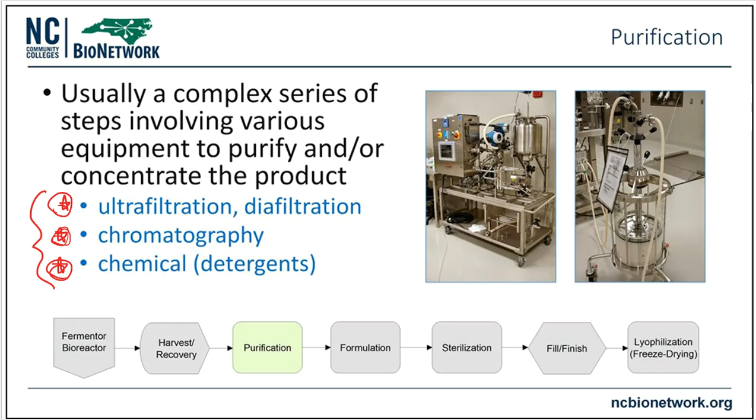Down at the bottom, we talked about a bioreactor or a fermenter, the harvest, the recovery, the purification, the formulation. We skipped the sterilization part. We went to fill finish, and we skipped the freeze-drying part. So now that you have a broader picture, now that you have this overview of what's happening on the inside of a company, we need to now take a little bit more time and discuss more details of certain steps along the way. And that's what section 5.4 is going to be about in your textbook.

So the process equipment section is going to start here. And one of the very first things, as you can imagine, that they are going to discuss is good old faithful. And that good old faithful is our bioreactor or our fermenter. So we need to go back and talk a little bit more about the details that go on inside of this contraption that could be way bigger than me in a manufacturing line or a production line.

So every facility needs certain pieces of equipment, right? That's what this chapter is all about. It's about equipment and it's about utilities. So we need to talk about the equipment. And this equipment, yes, it is fermenters and it is bioreactors, but you know what? It's way more than that, because the facility also needs equipment that will store the materials until we're ready for them, and then process materials, as I'm needing and using them, and then equipment that moves it from one step to the next. All of that is equipment, right? All of that are moving parts of the puzzle in the biomanufacturing arena.

So with the pieces of equipment, what you're seeing over here on the right-hand side are just examples. That's all that it is. It looks like I've got a big old maniac mansion bioreactor right there, and then I am putting stuff in it, and then we're taking stuff out through the help of pumps, and we're cleaning it up with some filters, and then we're putting it into another container or contraption, and then we eventually start filling up little containers. Okay, all of that is equipment. I know that, but we need to talk about details now. That's what this is all about.

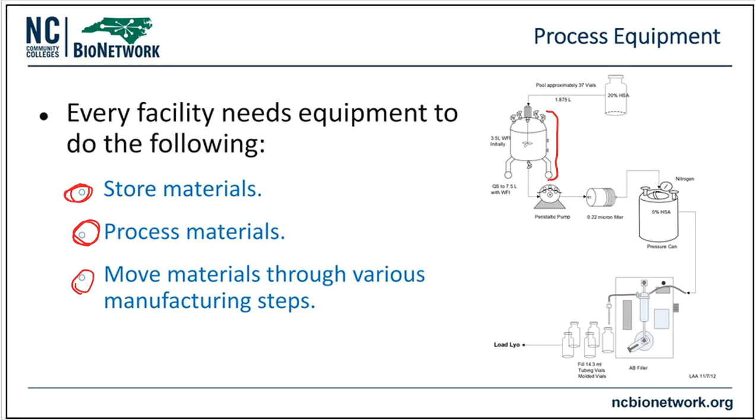The problem, oh no, is that some of the equipment is proprietary. So we don't really even know the little ins and outs of some of this equipment because these companies are going to keep it a secret. So we can discuss at least the general types of things that you're going to find. But as far as nitpicking details and saying this is the way it's going to be every single time, the answer is no, it's not. Sorry. Different companies will have their own ways of doing things. But there is a general trend here, and we could talk about some of these general trends.

We're going to have instrumentation or equipment that can handle liquids, gases, and solids. It really just depends on what I'm using, what am I making, what are we trying to end up with, and there is an option out there for all of those manufacturing types of companies. So am I making a liquid, and that liquid is going to go into a little tiny vial that's going to be capped? If so, there's instrumentation for that. Am I trying to recover a solid product and clean that solid product up? If so, there's going to be instrumentation for that.

So either way, the company is going to have what the company wants. And there is a chance that this piece of instrumentation or equipment will be modified in order to fit the specific needs of the company that you're working for.

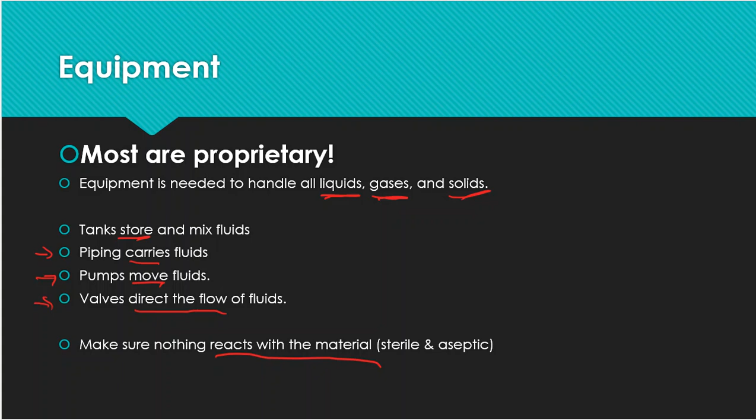So for that reason, stainless steel is actually going to be one of the most common, but there are different choices out there. We'll talk about those choices in just a second. Next up, these pieces have to stay sterile and aseptic. Aseptic basically means the process of making sure it's just completely clean and that it stays clean. And sterile, of course, is the idea that there's no germ, there's no interference, there's no contaminant at all, period, on the types of material and the things that I am using in the manufacturing line. So everything has to stay super clean.

I want you to think of a surgery room, right? That's sterile and aseptic. Aseptic processes take place, and that creates a sterile environment for us to work in, because we want to cut you open and we want to pull your knee apart and we want to tie your ligaments back together into a tiny little knot, and then we're going to sew you back up. Okay, so if that is the case, then I don't want to do that in a dirty, filthy, nasty alleyway. I want to do that in a clean, sterile environment. And biomanufacturing and bioprocessing is going to be the same way.

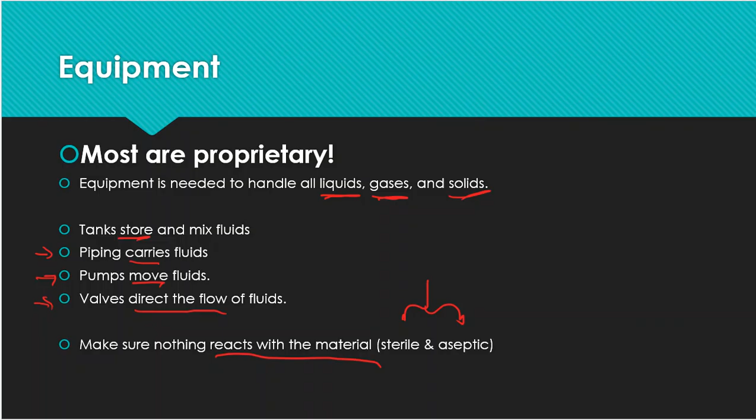Storing and mixing tanks, they do try to reuse them, and we call them fixed or we call them mobile. So fixed just means, of course, they're stationary. They're going to stay put. You're not going to be able to move the tank. And then mobile, of course, are on wheels. Okay, so that way, when it does what it needs to do, I can scoot it from one area of the facility to the next.

So reusable is a very good option, because once I drain or once I dump or once I use the stuff that's in that holding tank, then I can just make sure that it's clean before I go back and do it all over again. So that's less money that a company has to invest into equipment, because it is more than one-time use.

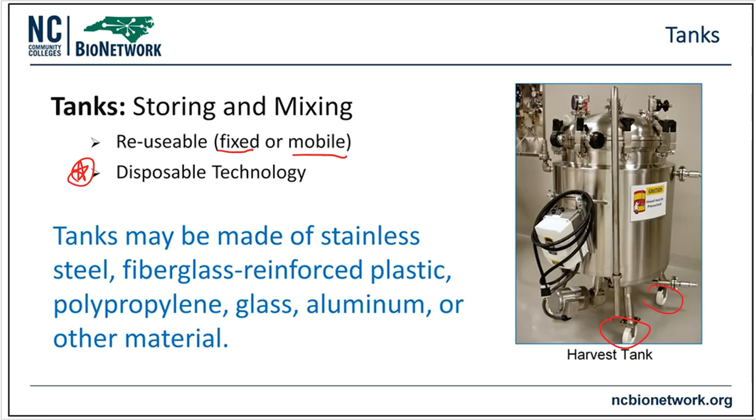Well, as you can imagine, these maybe aren't the best case scenarios for all manufacturing lines or all companies, basically due to the types of material that's got to be used in order to manufacture and make these tanks. So I'll talk about this in a minute, and I'll show you a picture of them. But fixed and mobile are perfectly okay options, and disposable is out there as well for those people that can use it.

As far as tanks go, tanks can also be above ground or below ground. Above ground means you can see them with your eyeballs, or below ground means that they're buried, and they're going to be stationary because of that reason. They're going to be fixed tanks, but either one of these are going to be okay depending on what the company does. They come in all shapes and sizes, so these fermenters, these bioreactors, holding tanks, whatever the case is.

You have options, of course, right? And those options can be conical shaped or sphere shaped. They can go horizontal. They can go vertical, cylinder wise. They can be what we call open and closed. So in opened, I want you to think of like a stock pot on your countertop or on your stove top. So it is a stock pot that you are making maybe chicken noodle soup in because it's a cold winter and that's what you're doing.

So that is open, right? You can take the lid off and you can have access to the inside. You can stir it, you can smell it, you can taste test it, you can do whatever you want to do without an issue at all. But there is a closed option as well, and the closed option means there is no lid that you can open up and get to on the inside. It's made in a different way, and I'll show you a picture of those in just a minute.

Many tanks are what we call pressurized. So here I want you to think of a pressure cooker. So again, if you're in your kitchen and you are pressure cooking something because, you know, that's how your granny did it. And hey, I'm not knocking it. I've got my own pressure cooker. I still use it. It works great. If you've never had a pressure cooker, I highly encourage it.

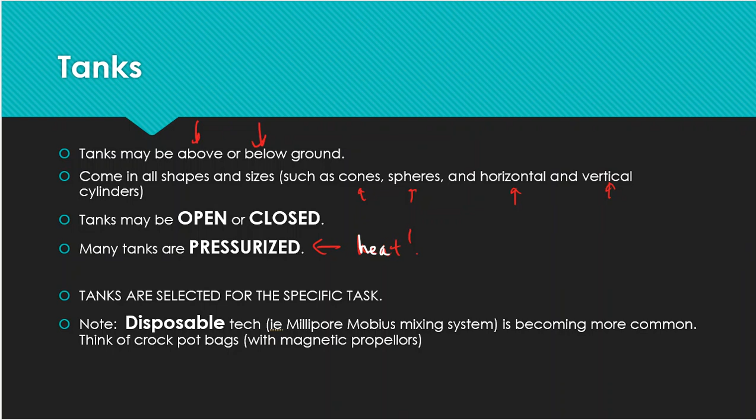But what happens is that you completely seal the lid off and you put this thing under heat, right? So heat is often going to be something that is needed for this process to take place. And that heat, of course, under a closed system is going to create some very, very high pressure situations for us. So we've got to handle that with proper care. So like a pressure cooker, you want to handle it carefully. You want to let it cool down. You want to release the pressure, release the steam, and that way you can safely open up the valves and then transfer things from one spot to the next.

So again, these types of tanks, these options are going to be chosen not by you, but by the engineers or by the CEOs of the companies, because they have an insight of maybe how that production should be made or how it should be handled. So these decisions are going to be made by someone else. We just need to be able to use them the proper way and know that there are differences that are out there, of course.

The disposable tech that we're talking about, Millipore is probably one of the most widely known disposable tanks that are out there. They have a Millipore Mobius, and Marvel fans, there you go, it's Mobius. So the Millipore Mobius mixing systems are meant to be disposable, and they are becoming more and more common.

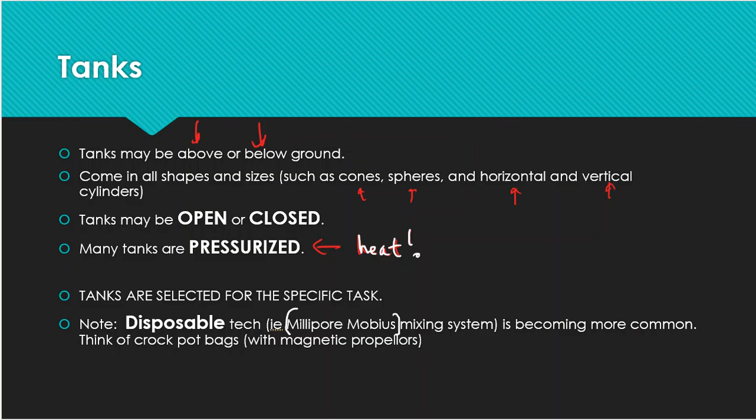And what I like to refer to these as, because I keep referring to things as the kitchen, because that's a very familiar space for you, I like to talk about these as crock pot bags. So crock pots, you cook low and slow, right? You put a chunk of meat in there, you put a lid on it, and you just let it cook all day long. Well, for some of us, we don't use any bags, and we open up the lid and we take everything out and we clean it and we wash it. Sometimes stuff gets gunked up on the inside. It takes a lot of effort to clean them. They're quite heavy, and some of us just don't want to do that. So instead, they put a plastic bag on the inside, crock pot bags.

So the bag is safe to cook in. You put your stuff that you need to cook, you put the lid on, everything's okay. After the cooking process is done, you take the lid off, you take everything out, and then you've got a bag that's left over on the inside that's holding all of the juices, all the liquids, all the waste that you need to dispose of. So you literally take the bag out and you just tie it into a knot and you throw it away. So there's no washing, there's no cleanup really if you handle it the proper way.

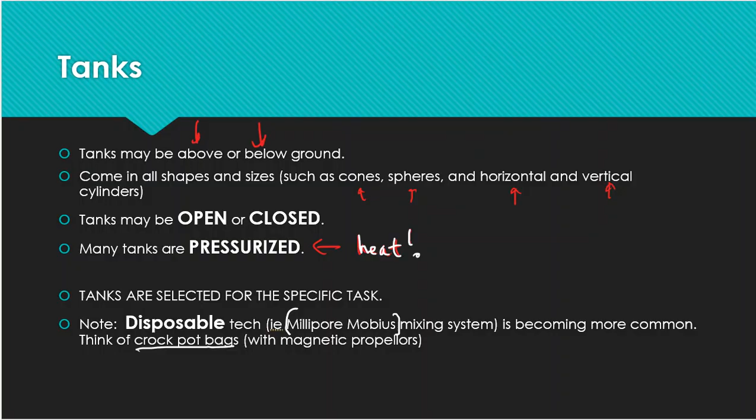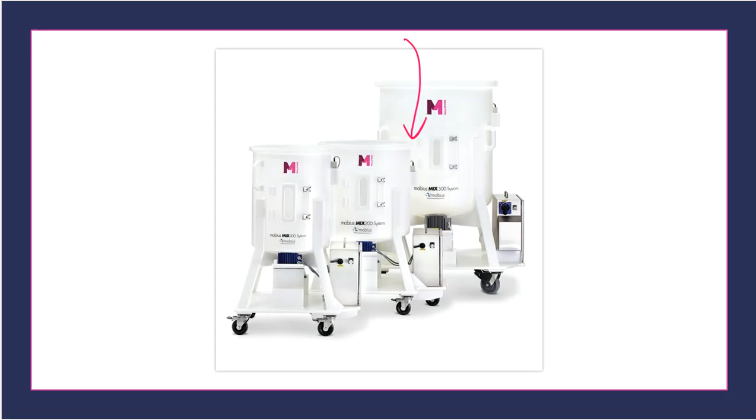Could you imagine cleaning some of these things? I mean, they're bigger than me, right? So I'm going to have to crawl on the inside of them. I'm going to have to get dirty. I'm going to have to get filthy and sweaty, and then, you know, making sure that it is completely clean. So that's going to be some testing that's going to happen on top of that. I mean, it is an issue, and some people just don't want to deal with it at all.

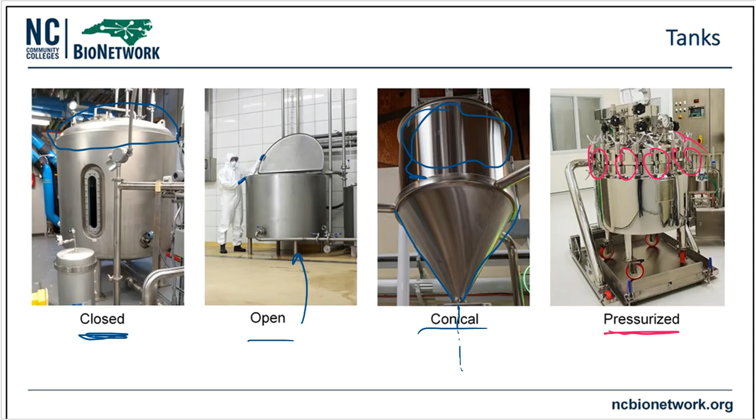So in the next video, what we'll talk about are the specific pieces and parts that will be located on some of these systems or some of these tanks, and we're going to talk about some of those common parts. So we're going to define these terms, we're going to talk about what they mean, what their purpose is, and we'll go through a little checklist of them. These terms are going to be pretty important, so you better have a piece of paper and a pencil ready, because when we come back, we'll be taking quite a few notes on different terms. I guarantee you that these terms are going to show up later on online quizzes and for the Module 5 test. So we want to be prepared for those. I'm warning you now. So if you don't have one, please get one, and that way you'll be ready when you hit play on the next video.